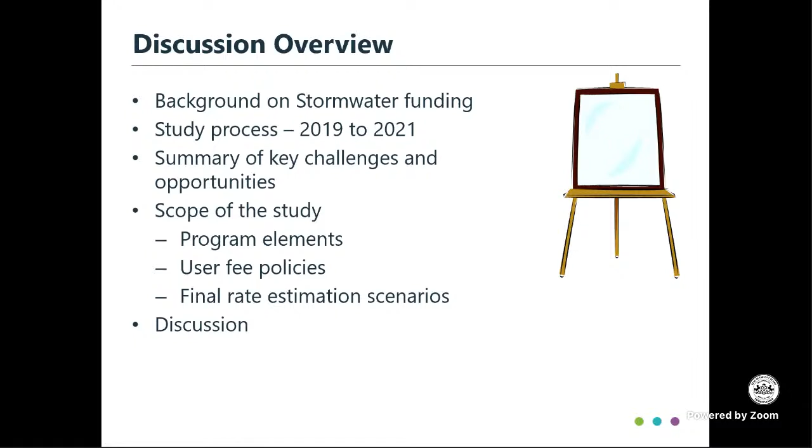Early days of managing runoff from property, driven by the development and density of property development, has been based on protecting property and protecting human health, basically to make sure that we are getting water off properties down into the natural system as fast as we can.

That was in place philosophically and operationally in our engineering process until EPA and the Clean Water Act was established in the early 1970s. In that set of regulations was the mandate to address the quality, the pollutant loading from a variety of sources. Stormwater was one of them. And with that, the regulations ultimately were issued after amendments to the Clean Water Act were passed in 1987.

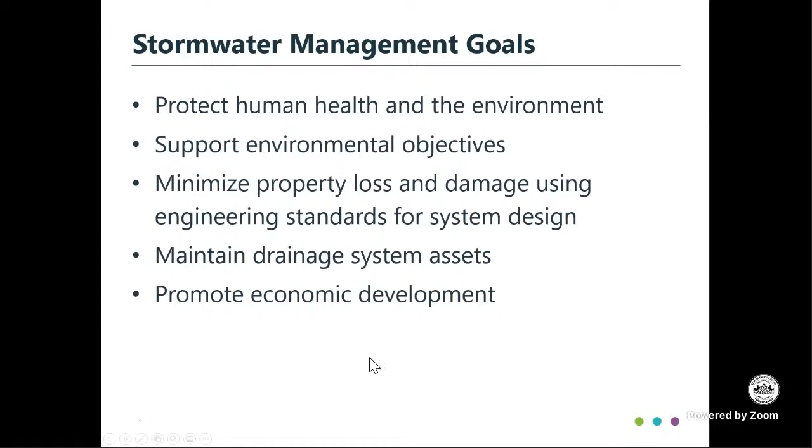In 1990, the mandate for local governments to take responsibility for controlling pollutants was introduced and wrapped into a set of permits issued through the authority of EPA, but actually handled by the Pennsylvania Department of Environmental Protection on their behalf. That changed the way we looked at stormwater across the United States in literally thousands and thousands of communities.

The philosophy of managing stormwater went from getting it off the property into a pipe, into a receiving stream as soon as we can when rainfall is occurring, to: wait a minute, let's stop it before it is discharged. Let's make sure it's as clean as it can be as it moves across hardened surfaces, rooftops, parking lots, industrial facilities.

Institutions, whatever the land purpose is, to first take a step to say it needs to be clean. It needs to be only stormwater, not loaded with heavy metals, sediments, those kinds of things that are of concern, organics. And so the whole idea of adding these kinds of green treatments has evolved over the last 30 years since the first permits were issued in 1992.

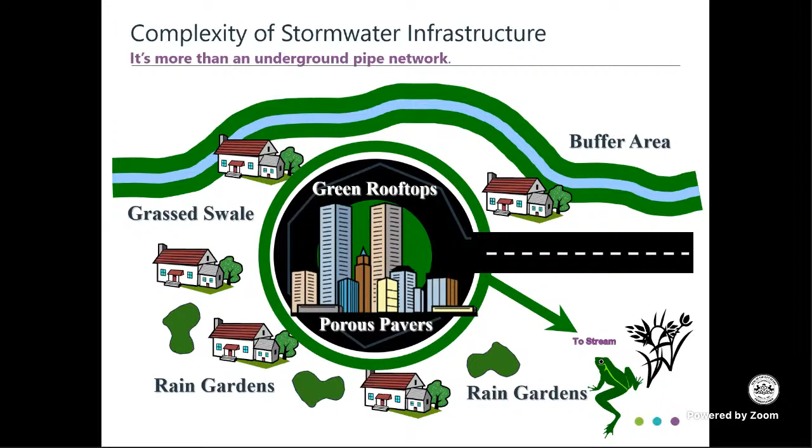What you're currently faced with is a permit that requires you to comply with fairly significant implementation standards and performance. But in addition, you have a drainage system that's aging. Every day it's going to get older. Its ability to carry the load that it was originally designed to handle may be constrained.

You end up with nuisance flooding. You may end up with serious flooding over time. So maintenance becomes a critical piece of this story as well.

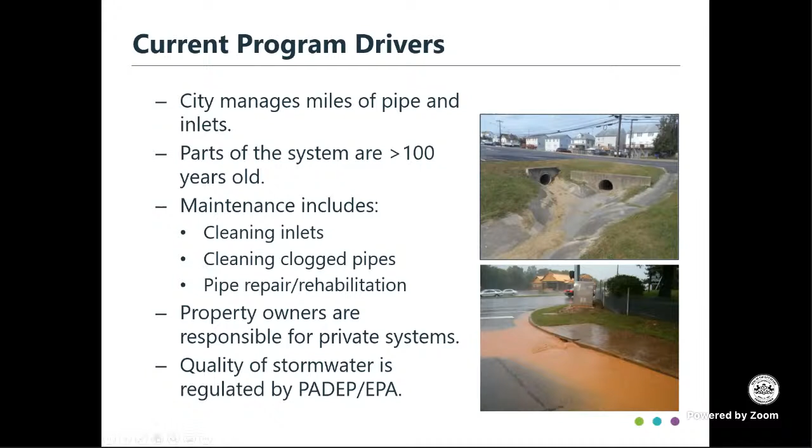And so we see stormwater as a practice in the services of local government become more and more complex. We took a look at the way stormwater, from a drainage operations perspective, touches various units within the city's government structure.

You can see by just this schematic layout, there are lots of offices who are adding value around managing stormwater, whether it's from code enforcement to public works, to partnerships with organizations like the Conservation District, like Erie County. You have a complex set of activities that are being managed across multiple organizational units.

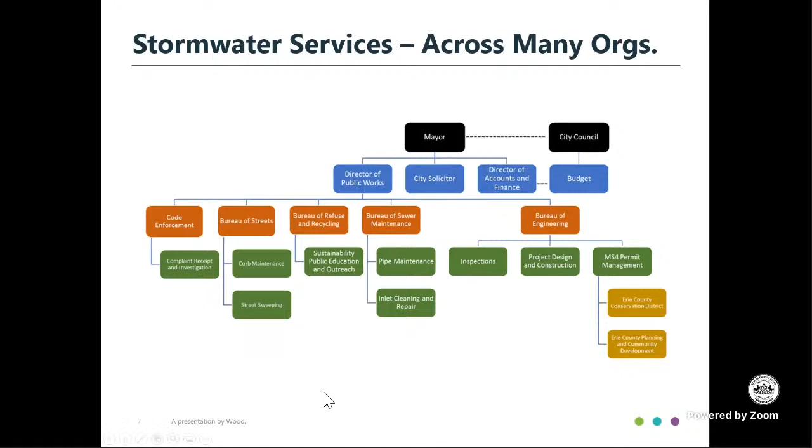I will tell you, this is typical. You are not unusual. This is, in fact, the way we see stormwater being managed all across the United States and Canada. We do work there as well.

So when the city came to us, we instituted a process to build baseline information, to understand what's currently being delivered in services and how that is being funded, and to understand what challenges are in front of the city as you go forward, and what your expectations should be in addressing the demands for services that are really driven by the fact that you are a relatively compact and dense urbanized area.

With that, we discussed with staff what approach to funding would be appropriate. We evaluated user fees and ways to establish direct charges for stormwater. To do that, we evaluated the data that's available in order to do cost allocation on the basis of a user fee, and ultimately established some of the assumptions that we would use in recommendations and findings going forward.

I believe Dave mentioned this, though it was difficult to hear the whole piece of what he was saying, but it is the presence of developed property that's driving the requirements under the Water Quality Act and your permit. We refer to it as an MS4.

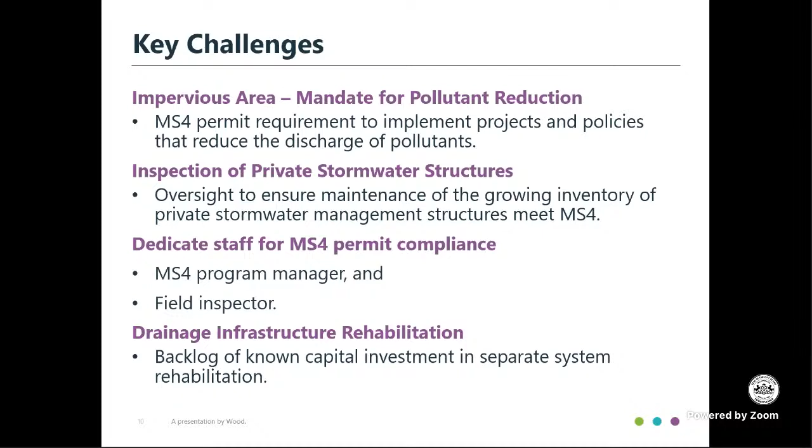Those positions are dedicated to ensuring the city remains able to face the compliance challenges in this permit that was just issued to you in 2018, and that you have a need for investment in the existing drainage network, simply to maintain that system over time.

So what did we recommend to staff? We recommended that you need additional resources over and above what is currently being provided. You need to look at your capital program into the future and solve not only your current backlog, but recognize that the more you know about this system, the more issues you're going to find plaguing it. When you have a system that's aging all the time, and its useful life is starting to meet its end, you need to be prepared for that, both in maintenance and in your capital rehab program. So one of the things we talked with staff about was establishing a capital reserve that would allow you to amass the funding necessary to start buying down a significant capital backlog.

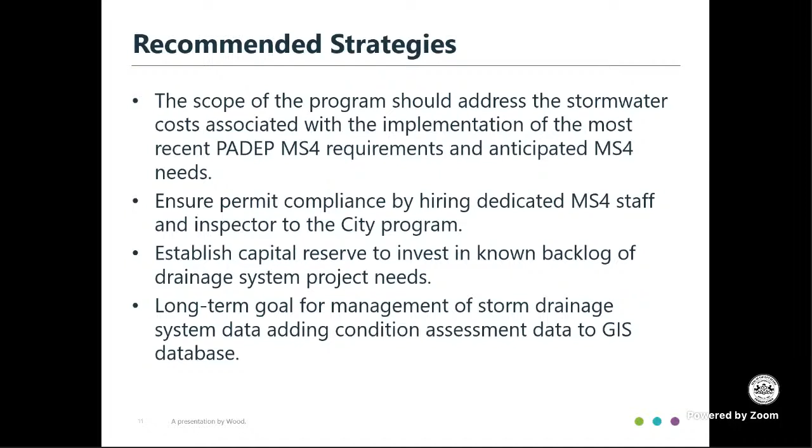Again, we recommended hiring additional staff to address the problems. Short-term focus: make sure you stay compliant and that you're able to meet the new terms in the 2018 permit.

That new term requires you to invest in capital. It requires you to reduce sediment loading from your drainage network by 10%. Every jurisdiction that holds this same permit is faced with the same mandate. You are not alone. Jurisdictions across the state are facing this 10% sediment reduction, intended to be in compliance by the end of your permit term. To do that, you need the resources. You need the capital money, and you need the staff that's dedicated to ensuring that this can be accomplished.

Permit compliance has multiple components. Not only is pollutant reduction required, not only are you required to inspect private facilities to ensure they are meeting the objectives of both your ordinance and Act 167 requirements, but you need to ensure that you have established appropriate funding for your capital program into the future. The mandate says by 2023 you need to be in full compliance. You need resources to meet that.

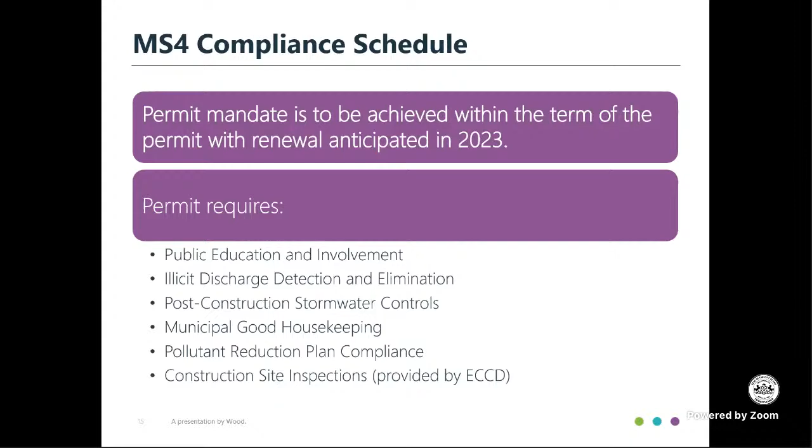The permit automatically requires public education and outreach. It requires you to go look for polluters. It requires you to make sure private properties are managing effectively. It requires you as a business to make sure your house is in good order, that your public facilities that you own and operate are not polluters. And it requires you, in partnership with the conservation district, to make sure that construction sites are well managed.

Private facility inspections are one of your targets for needing additional resources. You are to inspect not only your publicly owned facilities, but the private facilities. Again, it has a routine requirement. You must enforce if they are not meeting their requirements. You also have the obligation under the permit that if they choose not to actually take corrective action, you have an obligation to make sure that pollutant is not coming into the public system.

That means you could step in and make a repair. You could charge back the requirement as a part of enforcement, but you can't simply say, well, I can't get them to comply. Absolutely, you need to be able to do that. You need to train folks in the field to recognize pollutant sources, to recognize the potential that their own operation could pollute, and to make sure that they have eyes and ears focused on behalf of all of Public Works and engineering to make sure you are aware of and addressing concerns. When auditors come, they just want to drive through your city.

If they find something that looks like a violation to them, they will write it up and you'll have to explain either why it's not or what you did about it. So every permit cycle, every 5 years, you can expect this permit to get more difficult, not less.

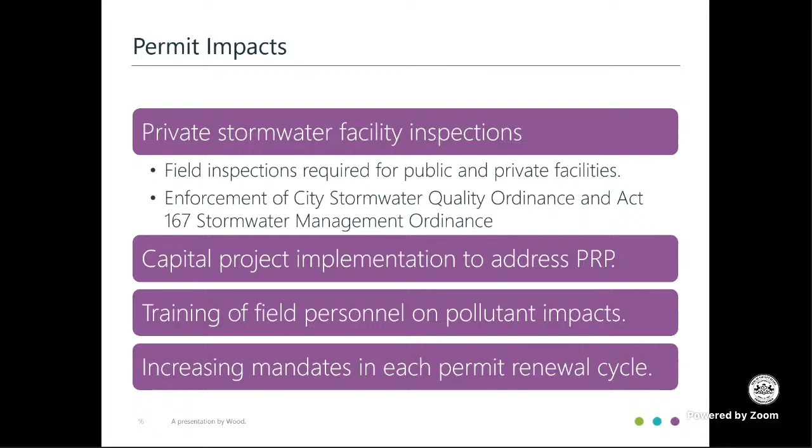We've not seen EPA through the Pennsylvania DEP or in any other jurisdiction reduce their demands. So the very clear conclusion was that it's not about whether there are going to be cost impacts for this continued compliance, but how do you distribute those costs?

How do you deal with that incremental increase that you need, and who should be involved in paying with it? So we looked at a revenue generation plan to make sure your long-term needs are met. One principle we heard clearly from staff, and that we as your consultant believe in, is fairness and equity as an important principle of who should be involved in paying for resources to meet these expectations.

So what is the link, again, to compliance? The link is impervious area. It's developed properties. If the city of Erie didn't exist, if there was no development along Lake Erie, Mother Nature would know what to do with this and would take care of it. Mother Nature is actually a whole lot better at balancing these things than we are.

The minute population started to increase, as development density increases, demand is placed on the government to put a good drainage system out there. We don't want all this water on our property. We don't want our neighborhood flooded. We want you to take it and get rid of it. And that's how we expanded the services of maintaining underground as well as above ground components of the drainage system.

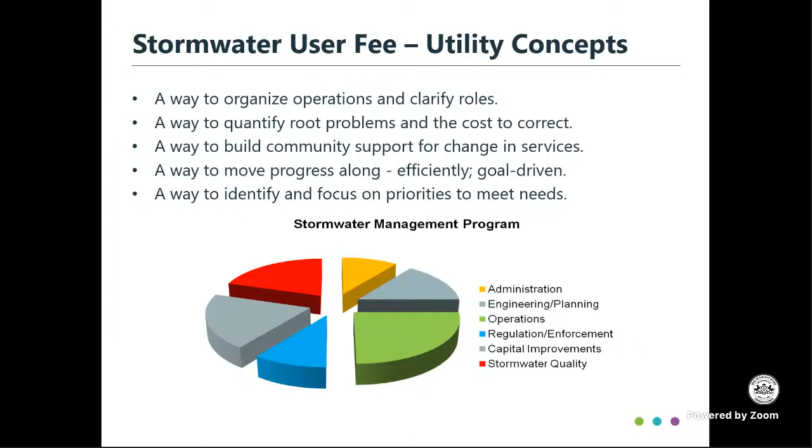It's trackable. You know what the revenue is coming in. You know what the revenue is being used for. It can be reported out. You understand what you're attempting to accomplish.

Again, stormwater utilities started in the early 70s with the Clean Water Act, with the recognition that drainage is a major infrastructure in any urbanized community. It is of significant value. It needs to be maintained. It needs to have appropriate funding. And so we see it evolve over time to now where there are literally thousands of communities who have stormwater utilities. I had the personal pleasure and challenge of implementing one as a public works director, and it can be transformational in empowering solutions to really become reality.

So how are they calculated? Again, what's the tie? It's development. The tie is back to impervious area. If we didn't have all this impervious area, drainage demand for services would be quite different. So the meter, just as we use a meter in water or sewer, or in solid waste, such as size of container or number of containers allowed, we're metering the service that will be delivered through some relationship to what is demand. Impervious area becomes the meter for stormwater.

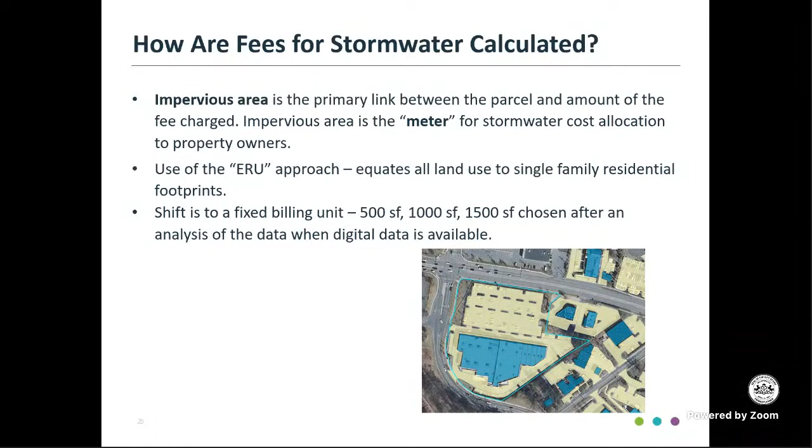There are two approaches to billing that have been established as best practices in the industry. We're going to talk in detail about each one. One's called an equivalent residential unit, and one is called a fixed fee billing unit. Let's take a look at what those things are.

Under an equivalent residential unit, all the parcels in the community are evaluated on their impervious area as if they were all residential. To do that, we establish what the median value is for impervious area in the single family detached residential stock parcels in the community. For Erie, that happens to be 2,136 square feet of impervious area. Again, we're not talking about house size, we're talking about house, driveway, sidewalks on private property, a garage — those kinds of things are what add up to a total of impervious area per parcel.

So in a case where you use the equivalency factor, you treat all the single family detached houses as one billing unit. All the other parcels are measured for impervious area, and you use basic math.

The billing unit is 2,136 square feet. Here's an example: an 80,000 square foot development, building, parking, has a detention facility on it. You do the math.

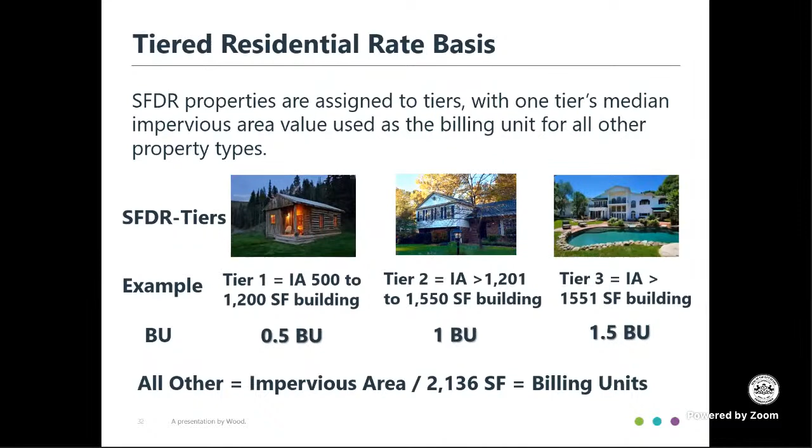Again, here's how it happens on other properties—a more business use facility. It has 3,345 square feet. Billing unit is 2,136. We divide it out: it's 1.6 billing units, we round up to 2. So it'd be 2 billing units times the rate set by the city.

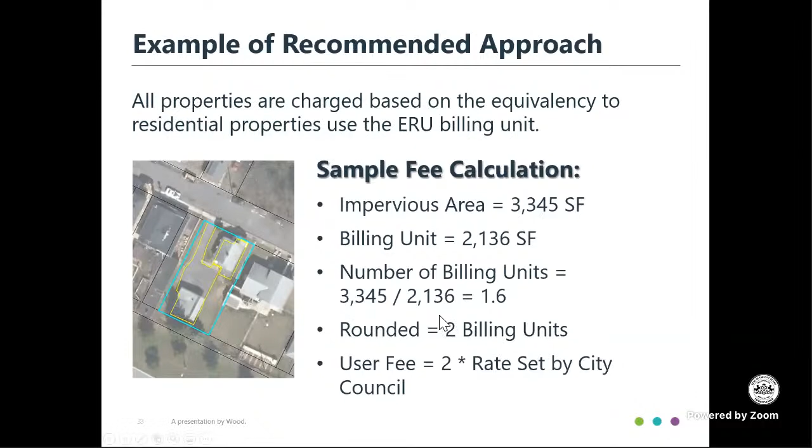Impervious area drives the number of billing units. One of the things we do is spend a lot of time evaluating data. We are working with the county to have the most up-to-date information we can use, and in the process of this decision, we will continue to review and evaluate this data so we have what's necessary to allocate this fee.

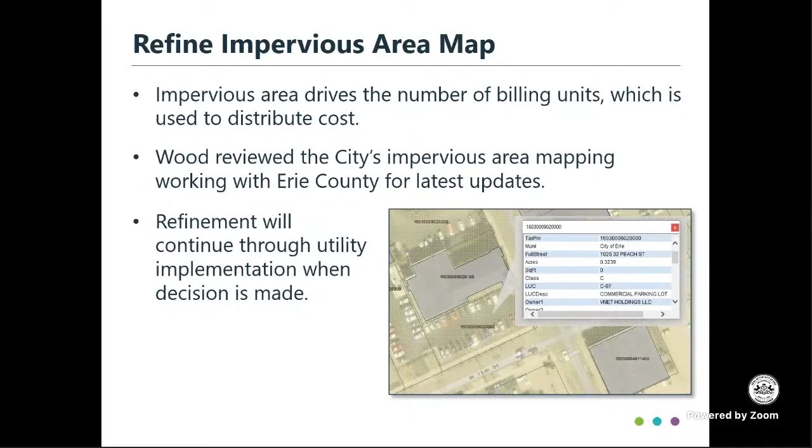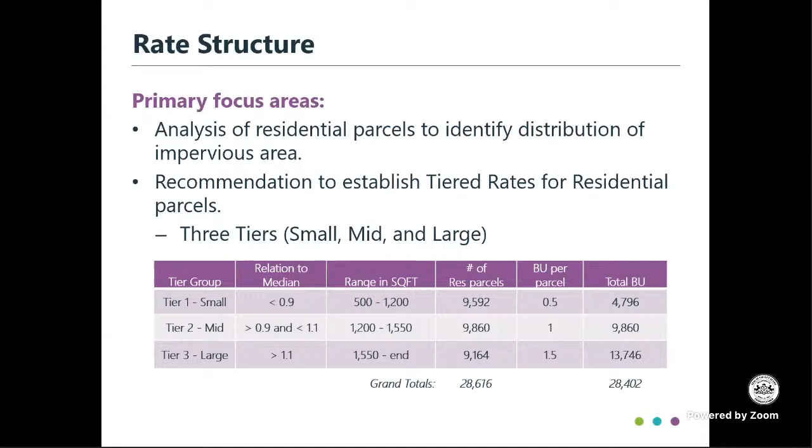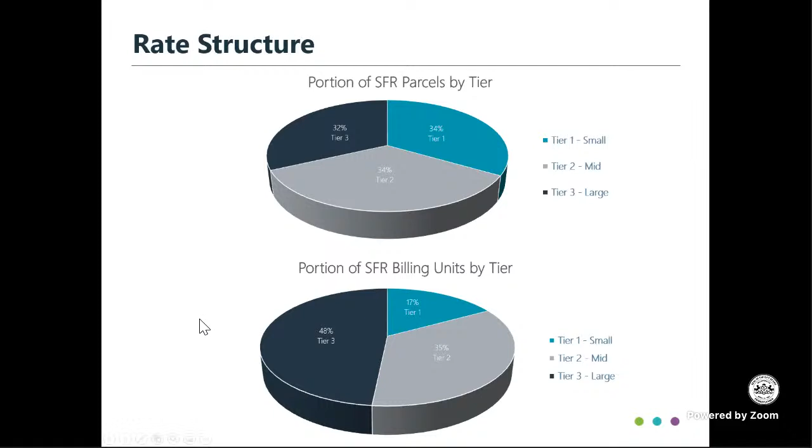Again, done typically for equity. This shows you the distribution of the tiers. So when you look at the parcels, you look at how they're divided up. Each one of the upper pie charts shows you tier 1, tier 2, tier 3, how they are by the number of parcels. And the bottom shows you how they're distributed by the number of billing units. So again, you see this shift from 34% of all your parcels to only 17% of tier 1 billing units. The tier 2 stays very close, and that's very typical. But the shift is that your larger impervious areas pay more. This reinforces that philosophy that those who have more impervious area pay more for charges.

One of the things that is important is the establishment of the technical standards of the analysis that we did. The question of a minimum threshold: the tools we have available for any of our utility work in stormwater are not precise enough for us to measure literally on a square foot basis. We don't have the technology available. If we had access to some spy satellites, we might be able to get down to that degree of refinement. We can't do that. So we typically set a minimum billing unit so that the smallest amount of impervious area that will be billed is 500 square feet. Anything under that is not billed. So that's an important piece of understanding the power of the tools we have available and the way that the charges are distributed.

So what does this rate look like? I showed you the kind of costs we're attempting to raise, ultimately about $1.7 million, taking into account all of the fiscal impacts. When we look at our rate analysis, a single billing unit is $24 per year. In the residential tiers, that would be 12, 24, and 36 a year - that would be their total charge. We were able to work with the analysis that you could hold that rate constant over the study period, unless you have a major event requiring major capital investment, in which case you might need to see this change. But the intent was, can we establish an approach that would be stable, predictable? People would know what was being asked of them for more than simply a short-term, one-time kind of charge.